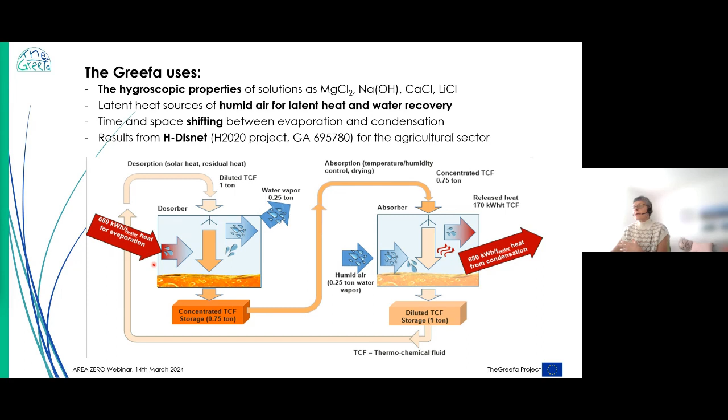They can also happen at the same time, but they need not be at the same time and at the same place. So we can recover heat in one place, store it for months, and then use it in another place after one year and so on. So this is the innovation.

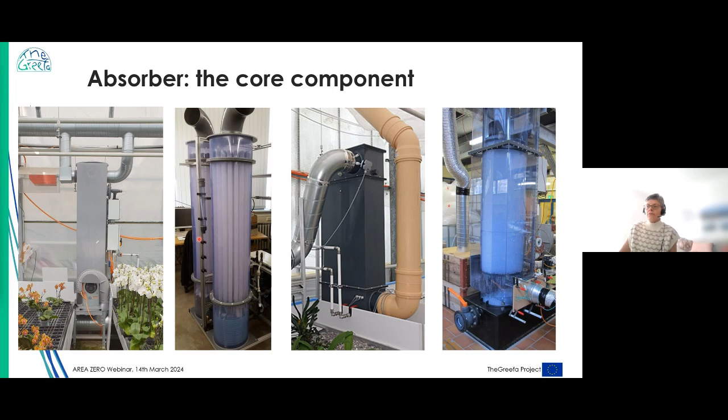The absorber where this process takes place is very simple. You can see here some constructions, actually plastic scrubbers. The rotating components are just a ventilator or fan for air and a normal pump for salt solution, so they are very easy. The construction and design can be different, but the concept of what happens inside is the same.

Why use this in a greenhouse? You can see a small schema. What happens, especially in a continental region, is that humidity is normally controlled by opening and closing the window, and of course, by opening the window, we lose a lot of heat. With this system, when we...

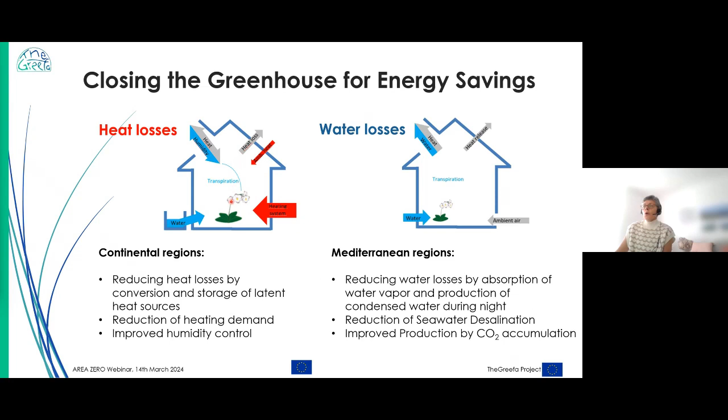So this is a standard greenhouse. We open and close the window, we have some heat loss, but we can control the humidity. In the greenhouse, it's very important to open the window because of the transpiration of the plants, otherwise the humidity becomes too high. With our system, we don't need to open the window anymore, which means we don't have these losses. The humidity is absorbed in our absorber, and this absorber at the same time can release heat.

Another advantage is that when we regenerate the salt solution, the water from the salt solution in the desorber goes into the air, and with some other component we can also recover water from the salt solution. So in the end we recover the humidity of the air, which can be used as water for irrigation and so on.

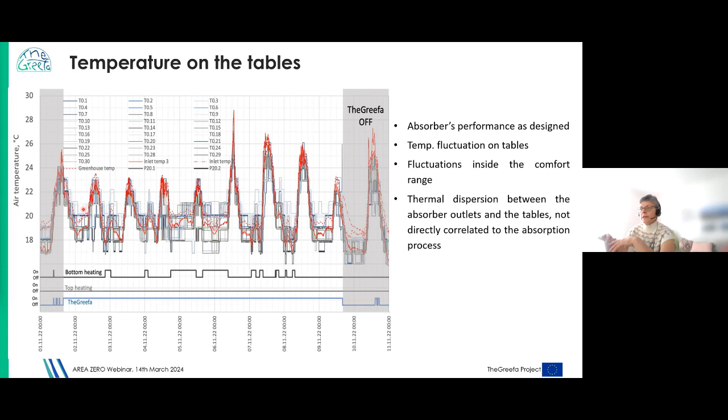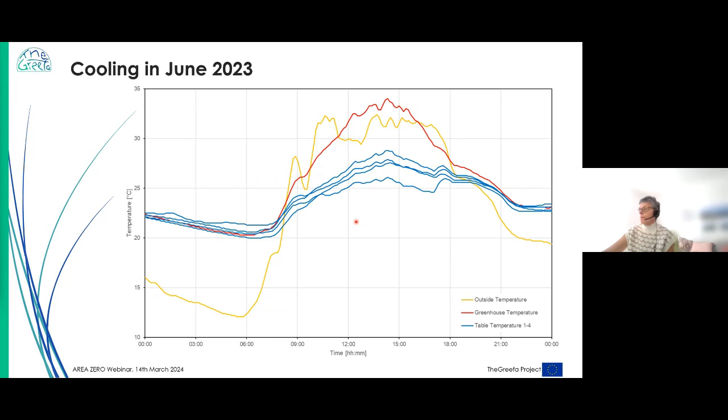If it was necessary to have a lower temperature, we were able to provide it by increasing the evaporative cooling. But for the operator of the greenhouse, this is an acceptable range. We tested this solution not just for greenhouses, but also for drying herbs and food.

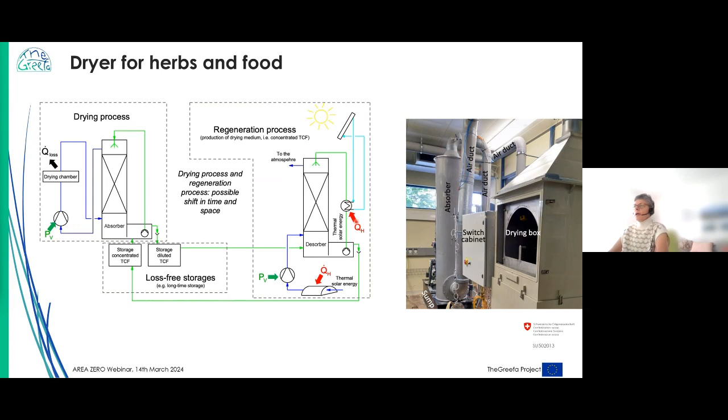In the absorber, you can dry the air, and this dry air can then be used in a dryer chamber to dry the herbs. Then it shall be regenerated with waste heat or solar heat.

We also adapted the construction of the dryer. It's very compact and easy to install in a real situation. If you want more results, here's the link—we have a report of this Swiss project. You can click there and get the report. I'm sorry, it's in German, but maybe you can translate it, or you know German, or you can translate it with some tools.

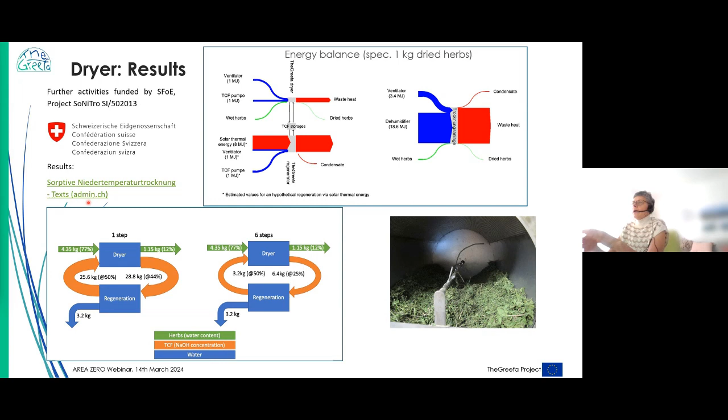But we found that what is important for the regeneration is not the absolute temperature we can reach, but the difference between the temperature of our salt solution and the air. So we need a temperature gap, not the absolute temperature. When the air temperature is 0 degrees, it's enough that our salt solution is maybe 10 degrees, not 40 degrees as in summer when we are at 30 degrees. So what matters is having this gap.

That means we can regenerate our salt solution very well also in winter when we have sunny days. The limitation in winter is, of course, that there are fewer sunny days, at least in our region, and fewer hours of sun than in summer. But when we have a sunny day, we can regenerate in the same way as in summer.

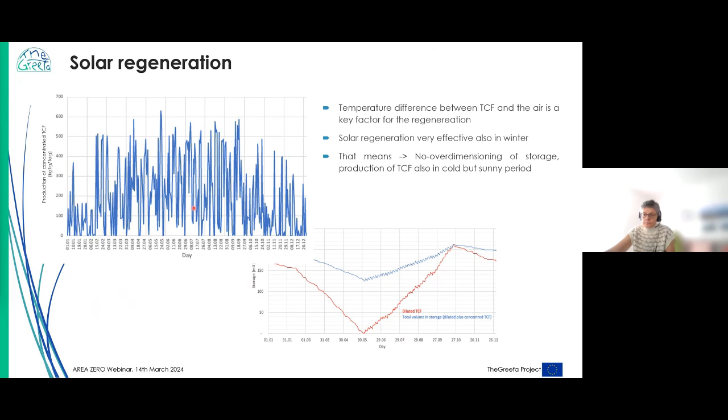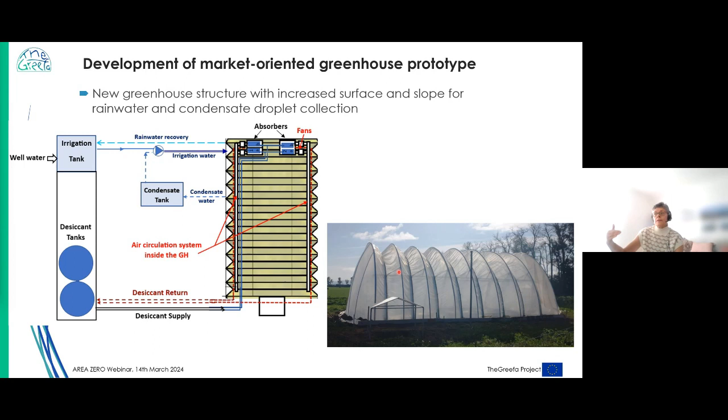I introduced before at the beginning and said that we have also another demonstrator, the greenhouse that we have in Tunis. The concept of a salt solution is more or less the same that we have in Switzerland. I repeat, we recover the water from the humidity of the air as water, and also with this construction it's also possible to recover the water, so the condensate droplets on the surface, and this is then used for irrigation. So this is some construction of our absorber, but if you have a question, I can explain better in answer.

So this is the presentation regarding TheGreefa, and I'm here for any question. Thank you. Great, thank you very much.

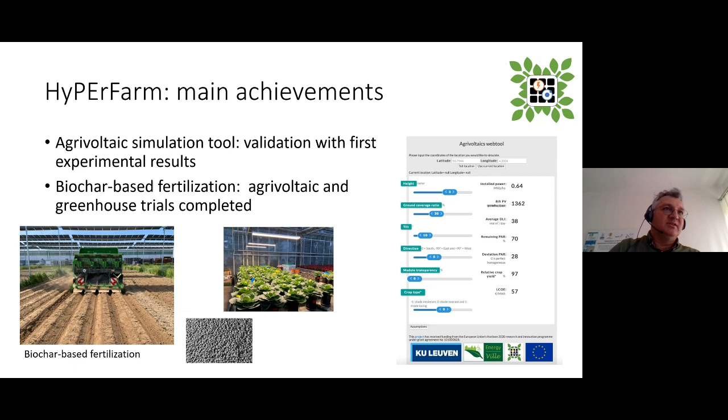Of course, biochar is not really linked with electrification when you look from a side, but here the aim is to produce biochar with solar energy, and then it can fit in the production plan. Here we do not have outside data yet. We see some crop data in greenhouse trials completed, but for the outside data we have to wait until the HyPErFarm project stops.

And by end of spring this year, we will have a compressor unit finalized that compresses the produced hydrogen, cleans it and makes it more dry, and we will use it as a part of a fuel for a hybrid tractor that drives on diesel and will use the hydrogen in its air inlet to reduce the diesel consumption and to retain its power. Again, the data will be there by the end of the project, but we foresee by the beginning of May that we can run our tractor.

We did a desktop study on batteries or storage systems on site, because we know that for a healthy business case on farm today here in Flanders and in most of the partnering countries, it is best to consume your own electricity and not to put it on the grid. That business case is not viable for the moment, but when you can be self-sufficient or partly self-sufficient, we tried to predict what type of farms benefit the best.

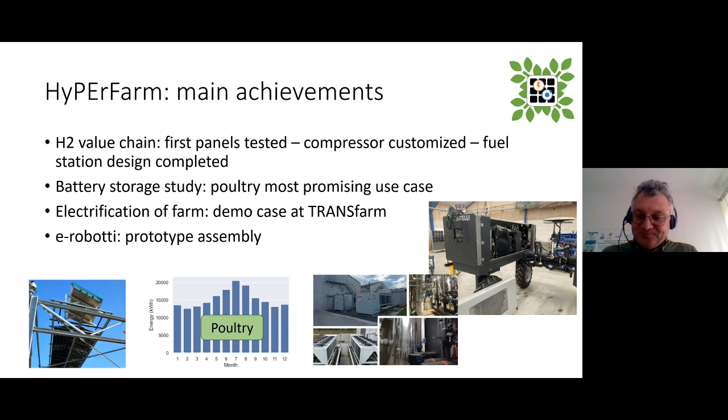No, I forgot to tell you that we climatize our animal units for poultry and pork with air heat pumps. And so we have a reduction of 100% of CO2 emissions today, and we climatize our animal units completely by electrification on site.

But what is important too is, of course, when it is interesting for farmers to start building, and what is the footprint of building systems. And when you go into the air with your solar panels and you don't use rooftops that are already available, you see on the right hand side that the cost of iron is really a heavy cost, not only in euros but also in footprint for your installation. So we are aware that not all arrows are green, there are still red arrows even for sustainability.

And there is, of course, a value proposition canvas that we made. Here we have more effect in production on our land because you have crops and you have electricity. There is also a new income from the energy because you don't have to buy it, or you can sell a little bit of it. We could not show yet that there are increasing crop yields, but there the crop research is ongoing. And of course, there are still high hurdles like permits, which are not easy, and the link with the grid, which in farm areas is quite far away, so a cost.

At the bottom right hand side, you see the network of possible stakeholders that can join us in electrifying and hydrogenizing farms, but I will go a little quicker. You see that we have looked not only at the economical side of the story, but also at what other people are thinking about what we are doing.

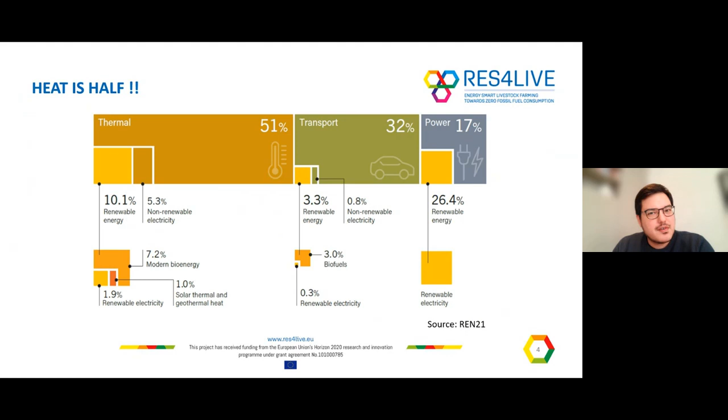We have 4 pilot farms, and in 3 of them we have installed a solar system, and this is what I will talk about today. So just a quick idea that I think is quite important. Thermal energy: half of the energy we consume on the planet is in the form of heat. And that being said, I'll explain a little bit about what a PVT panel is.

Or rather PVT collector. It's a combination of a solar thermal collector, which is characterized by the tube that you can see. It's a pipe basically where a water glycol mix goes inside, the sun heats it up, and then out comes hot water. And then you have a PV cell or a PV module that's laid on top. There are different ways of making a PVT collector.

The one you see here in the picture is a well-insulated one, which is good for high thermal efficiencies. But then you also get some which are not insulated to provide cooling for the PV modules, because PV cells do not like heat. As they get hotter, they become less efficient. So PVT collectors are very interesting when you have low space availability and you want to maximize your energy production per square meter, and also cost per energy.

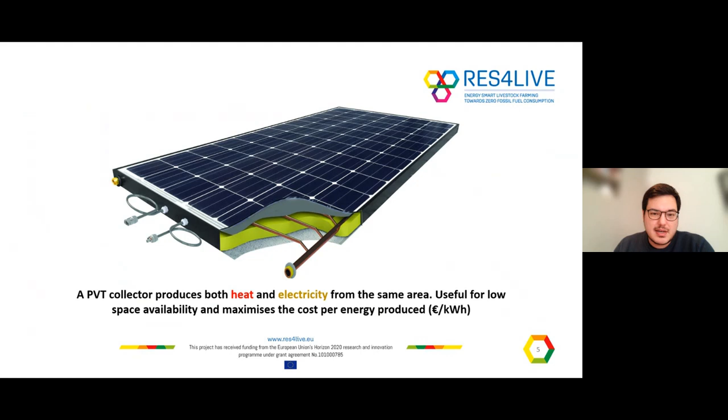So here you have a maximum efficiency collector. A PV cell can only be 20, 30 maximum percent efficient, whereas a thermal collector is 4 times more efficient at around 80%. So if you have a PVT collector, you'll have maybe 70% heat and 20% electricity coming out from one collector.

So in general, we have three pilot farms that we installed this technology on with 3 different PVT technologies, 3 different integrations with other renewable energy systems, and we have the same number of collectors per farm, just so we can compare between farms. So the first farm is in Ghent, in Belgium. It's the ILVO swine farm.

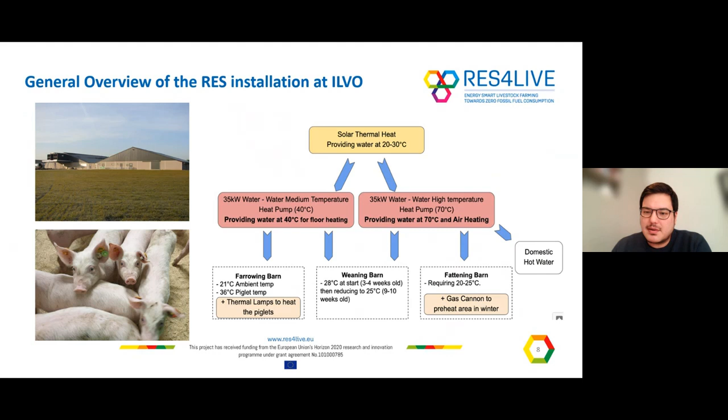The thermal collectors are connected to a short-term buffer tank, 800 liters of heat storage, and then the heat pumps draw the heat from the heat storage, and they create the heat for the actual farm. These have all been installed during the course of last year, so we don't have exact data yet, but we estimate 24 PVT collectors will amount to about 25% of the heat demand of the farm.

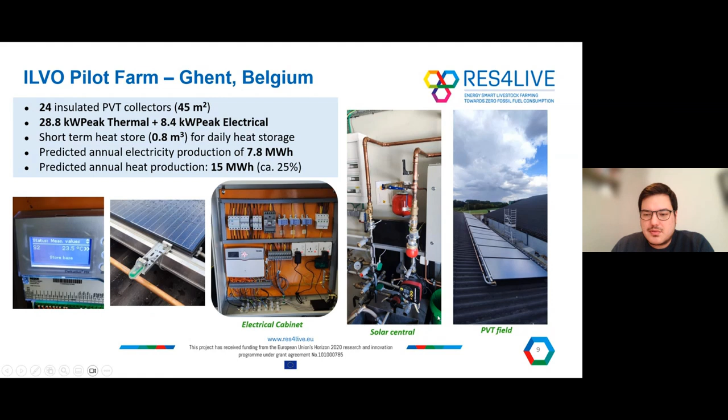Then we have LVAT Dairy Farm in Germany. Here we have a cattle farm, which has a milk chiller in the farm, and this milk chiller creates heat, which is being used by the farm. So we decided to take that heat and then further upgrade it. So the heat coming out will be around 40 degrees.

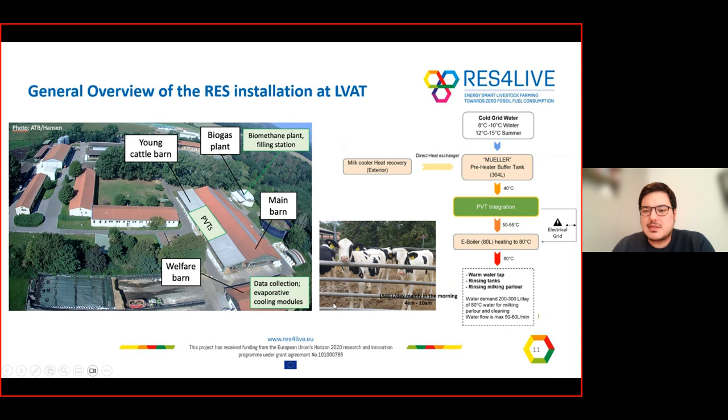It'll be upgraded to 50, 55 degrees by the PVT collectors. And then the remaining heat will come from an e-boiler that's on site. And that's being used for domestic hot water, cleaning of the barn, cleaning of the milk tanks, just general cleaning and usage of water.

So here we have a very interesting type of PVT collector, which is a concentrating PVT collector. You can see the solar field on the roof in the bottom left. It concentrates the sunlight to an absorber, which is under these PV cells that you see on the collector. The PV cells are bifacial, so they're on the top and on the bottom, as well as having the thermal absorber at the bottom.

This solar field is then connected to a larger buffer tank. There are 2 tanks of 750 liters each, making a total of 1,500 liters. This is then connected in between the milk chillers and the e-boiler. So it takes in the heat from the milk chillers and then upgrades it to provide higher heat for the farm. Again, we predict that it can contribute to around 30% of the heating needs of the farm.

Of course, just to mention, these are just pilot demonstrations. A farm can easily put many more thermal collectors to have maybe 90 or even 100% of their heating demand from solar thermal.

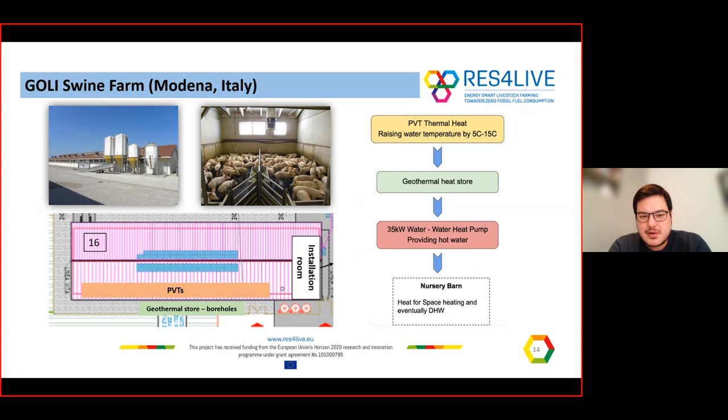Then we have our third pilot farm, that's the Goli swine farm in Italy. Here it's again a swine farm, and here we integrate in a different way. The PVTs are connected to a geothermal heat store this time. It's a borehole geothermal heat store, which is also connected to a heat pump. The boreholes will act as a seasonal storage. So the idea is to store heat for the winter, which the heat pump can then use, as they don't need space heating in the summer.

Here, a different kind of PVT technology was used. This time it was uninsulated. It's just a pipe with a PV module attached on top, much cheaper, more reliable, but also not as efficient. Since we don't need that much heat in this farm, we decided to go for this option, as it's also more efficient for the PV cells for electricity production. We predict about 90% of the space heating demand of the farm can be covered with this small solar field.

But again, this has just been installed, so we're now monitoring how it's working and all the data. We want to get results on how much they actually produce and how much it contributes to the farm.

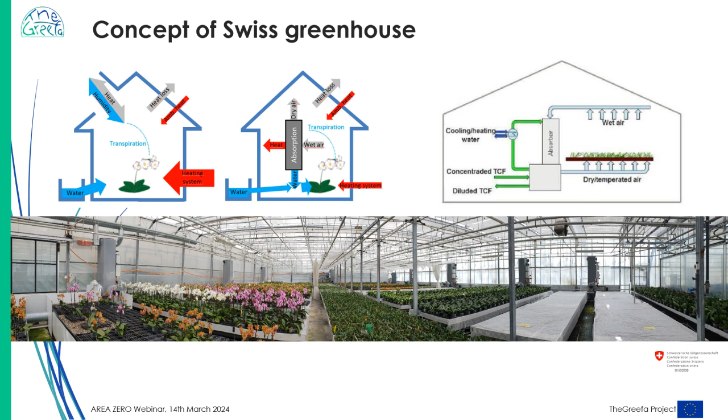So you see the greenhouse. What we add in the greenhouse are these components here. This is the absorber. And of course, you need some pipe for the salt solution, that in our case are around the wall. And the big desorber, for the regeneration of the salt solution, is outside of the greenhouse. It is a component like this, bigger, with a diameter of almost 2 meters, and is outside, unlike the absorber.

That means you don't have modification. The existing heating system is in any case installed and supports our absorber when we are not able to reach the required temperature. The increase of the temperature depends on the humidity of the air. If we are able to absorb a great amount of humidity, we can also produce more heat. If the humidity is not so high, the heat release also is less.

That means in any case, you need a support, especially for heating, the classical heating system, and you need some space to install this absorber, but you have additional components. You don't need modification. I hope that it's clear.

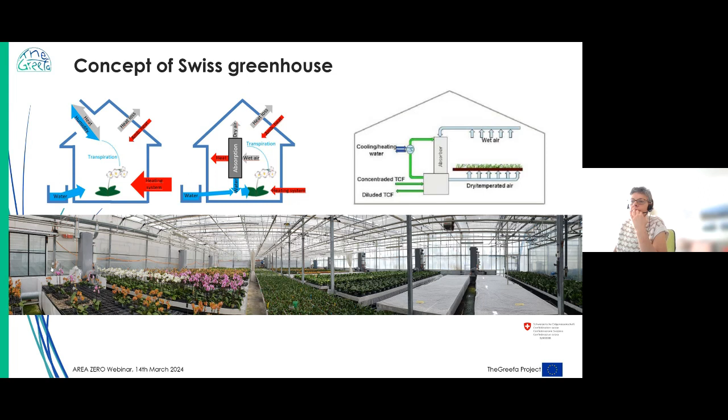The panel discussion will start with an introduction of the moderator and the panel members. Then we will have a discussion around 3 propositions. The audience will be allowed about 1 minute to vote. We ask you, the audience, to also raise questions and we can put them forward as we've done so far. We will start with the first proposition for the audience. As we await the results, we ask moderator Marleen Gijssen from the Boerenbond to take over and briefly introduce herself, and the other panel members as well. So get your phone ready for the voting, and I will hand over to Marleen.

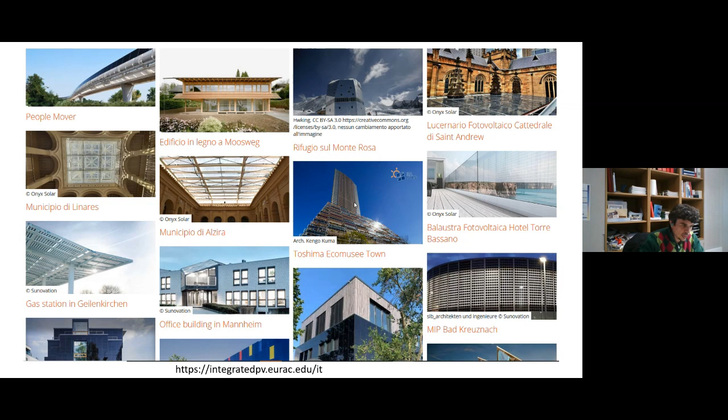When we wrote Symbiosyst, we thought about the key knowledge of the partners, and a lot of the R&D and industrial partners come from a lot of experience in integrated PV, mainly BIPV. We know that in BIPV we made a lot of advances, but also a lot of mistakes, because initially we really underestimated the complexity of having several stakeholders like designers, architects, planners, city planners, policymakers who have different opinions about aesthetics and so on. We thought maybe we could learn from all those mistakes and make sure we would not repeat them in agri-PV.

So here is just an example of how beautiful PV can be, integrated in various infrastructure. And those are the premises of the Symbiosyst project.

We believe the potential on rooftop systems is high, however the rate of installation is low. We know that large utility-scale PV is not a feasible option in many regions, especially in Europe. We have a lot of experience on the multiple levels of integration and involvement of various stakeholders coming from the integrated PV sectors, and what it means to have significant barriers for widespread adoption. So we believe agri-PV is in a unique position to learn from the past, to make sure we don't repeat the same mistakes.

We also want to avoid a concrete risk: having a broad definition of agri-PV used to justify large utility-scale PV systems just by cultivating some grass between the PV systems. This could represent a stop for the whole sector, because it could not be accepted by the population.

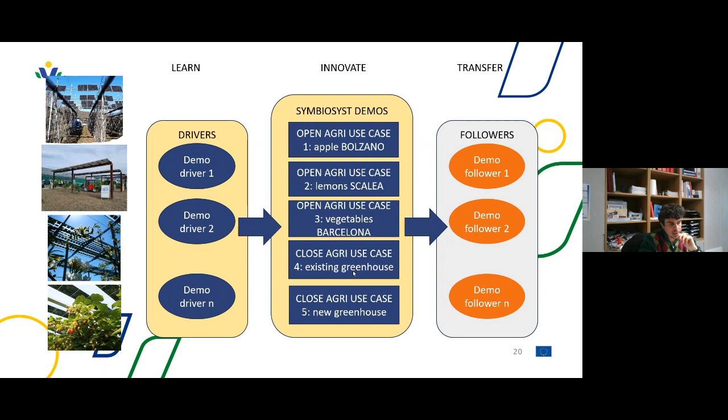So we will have different demos in Symbiosyst. The main demos will be one on apple orchards in Bolzano as an open agri site, vegetables in Barcelona, also open agri, and a greenhouse in the Netherlands.

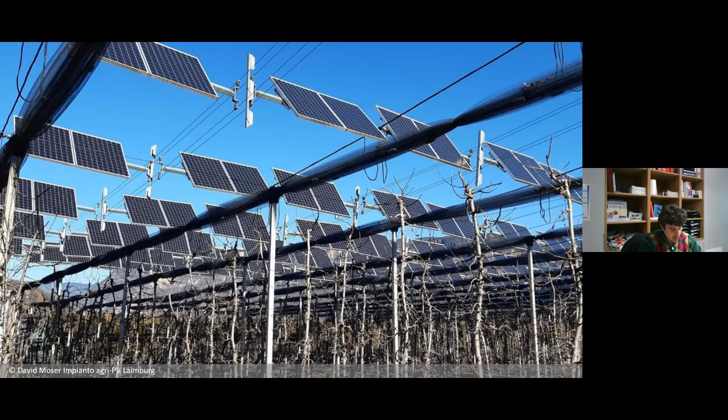An example of learning: this is an agri-PV system, old style, installed in 2008 — probably the first agri-PV system in Europe, installed not far from Bolzano. We are going to install the new system close to that, also to show, from an aesthetics point of view, how the sector has advanced.

The idea of the demo drivers is really to provide valuable information on structure, data, sensors, and monitoring systems. So if I'm also talking to the projects previously presented, if you have any experience to share, please join our demo drivers group. We will organize events and calls together with the Symbiosyst consortium, and see how we can mutually benefit from this exchange of information.

We want to innovate. We have a lot of partners involved in modeling, looking into light sharing in open agri-PV, both in open fields and in greenhouses, and looking into the effect of albedo and reflectance. I'll show you some results later on.

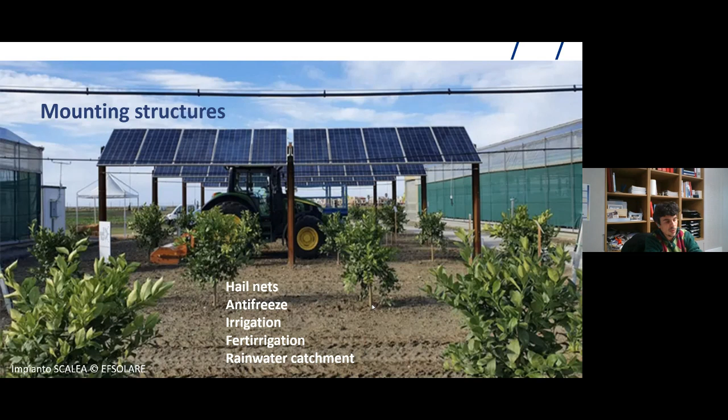In terms of mounting structure for the open agri system, we are looking into single axis tracking systems, exploring different levels of semi-transparency of the modules, and the integration of hail nets, anti-freeze systems, irrigation and fertirrigation, and rainwater catchment. We are also looking into robotic solutions with the partners from Barcelona, for example.

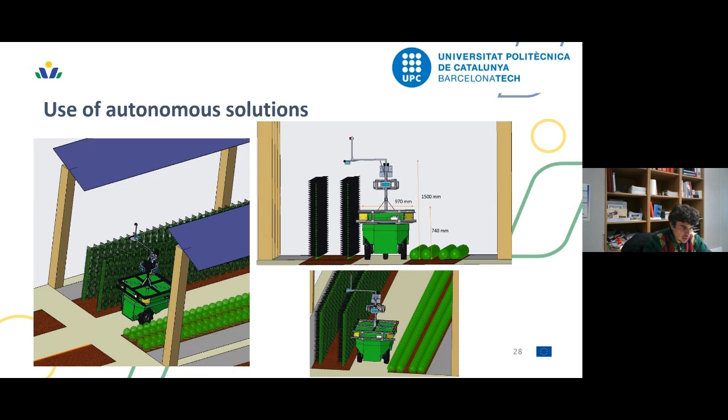Here are some preliminary designs, but in reality the robot is already operating — it was demonstrated to us during the last meeting in Barcelona in January. The robot can travel in the field, create a 3D mapping using LiDAR to build a digital twin of the crop and the agri-PV plant. It can do image recognition, and at this point in the project they are training on images to recognize different types of leaves and the status of the leaves.

Just a few details about the demonstrator in Bolzano: it will be a 90 kilowatt peak demonstrator with single axis trackers, at a height of 4.7 meters. We're going to explore different levels of semi-transparency, and look into installation on an existing plant with crops, but also install together with new crops, to really look into both challenges of introducing an agri-PV system with existing trees and with new trees.

Moving towards the conclusion, we are also looking into environmental and social justice through semi-structured interviews, which we're going to conduct for Italy, Spain, the Netherlands, and possibly Belgium.

It was interesting to see the paper published by the other projects. So far, from Südtirol, we have more than 500 responses from local farmers, and it's interesting to see that more than 40% would like to install an agri-PV system.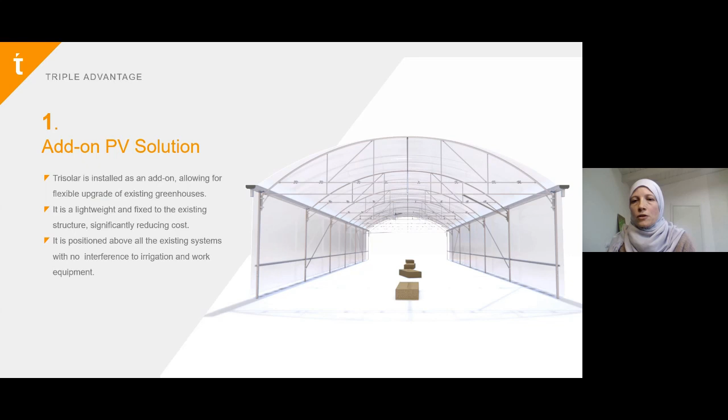But first I want to explain what the technology is about. It's a crop responsive agrivoltaic technology for inside greenhouses. You can see here it's mounted inside the greenhouse. It uses the existing greenhouse structure to mount, so there are no additional structural elements, and it's mounted above crop level, so it doesn't interfere with the agricultural work inside the greenhouse.

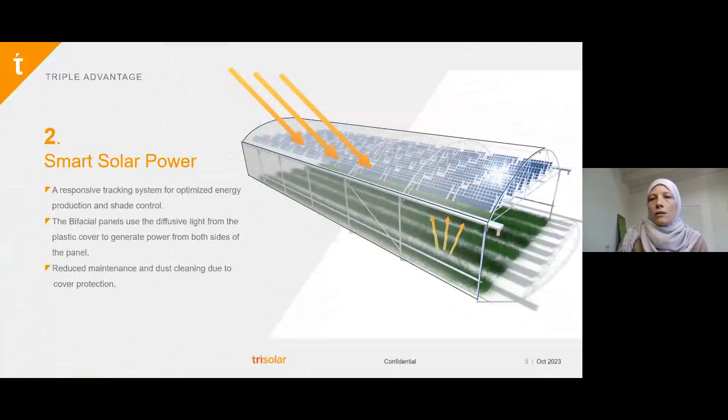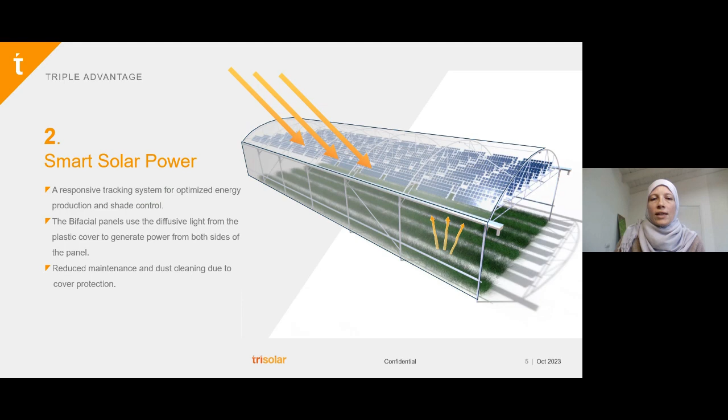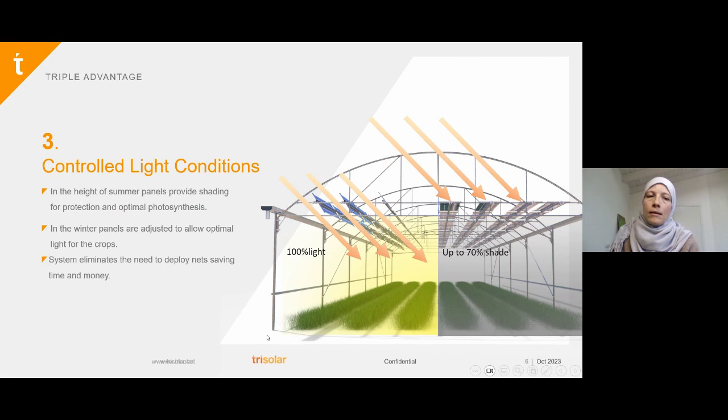The tracking technology, as I mentioned, is crop responsive, so it can either do some tracking if there's too much light, or be fully open when there isn't enough light, as you can see here. So it can provide full light by tracking the sun open, for example, or full shade by tracking it shut, providing maximum energy output.

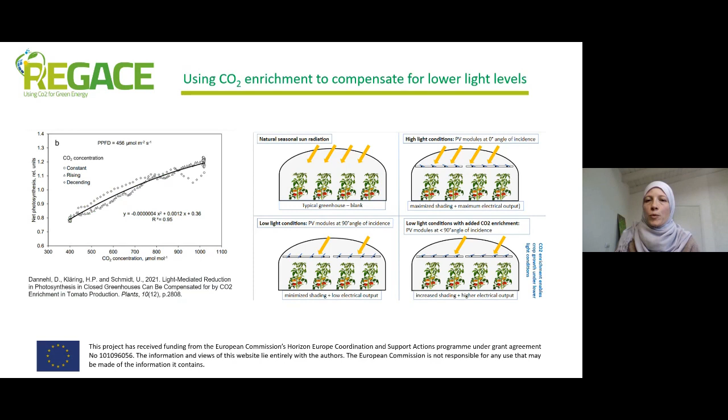So the idea here is to combine this technology with CO2 enrichment so that we can increase both electric and crop yields. When you use CO2 enrichment with certain crops, you can work with lower light levels, and by doing this our panels can face the sun more, producing more electricity. We're looking at this especially for more northern climates, so that this technology can also be appropriate for them. So there are different work packages.

I won't go through all of them, but we're looking at different aspects. So the implementation, so adaptation to different greenhouse types. Then there's the testing of it. So looking at the effect from various aspects, from the electricity production to the crop yields, the crop behavior, and the greenhouse microclimate, and the effect of the CO2 enrichment with this as well.

Then there's of course also looking at validation, also looking at the social aspects in this project, where our partners in University of Tor Vergata are looking at how this technology is getting feedback from farmers, and they've done a bit of work which I will present as well on that side. There's of course also the economic and environmental aspect in the project.

So the technology that I just showed will be installed in these different locations, the most northern one in North Germany, and the most southern one in Kfar Qari in Israel here. We have two farms that are shown in red, and the other installations are in research centers and universities. And we're looking at different methods of CO2 enrichment. So we have the standard CO2 cylinders or tanks, which will be tested in Berlin and in Volos.

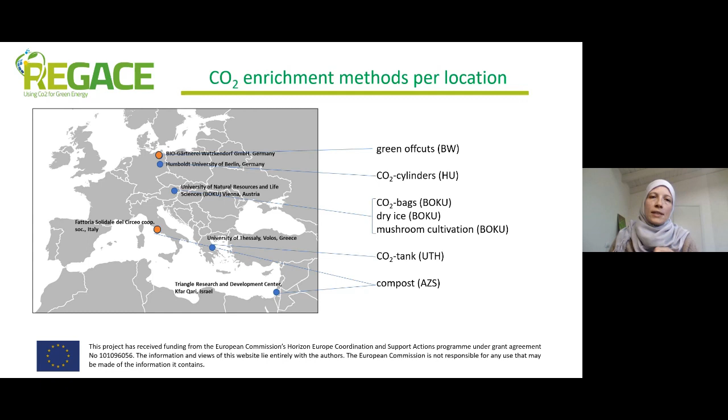But in addition, we're also looking at more sustainable ways of CO2 enrichment, using green offcuts or compost, or also mushroom cultivation, as shown in Vienna. Our partners on the farm in northern Germany already have experience with this, where they spread green offcuts in the greenhouse, and this naturally increases CO2 levels by about 200 ppm. So this is something we would like to test in combination with the tracking technology.

So the idea is we're looking at it on two levels: the way the technology works in these different climatic conditions, but also how we bring in the CO2 enrichment part. On the top picture, you can see our first installation, which has already been installed on the farm in Italy. The testing and measurements are just starting now, but at the same time our partners in Berlin have been testing different light levels, different CO2 concentrations, etc., within these phyto boxes that you can see in the picture below.

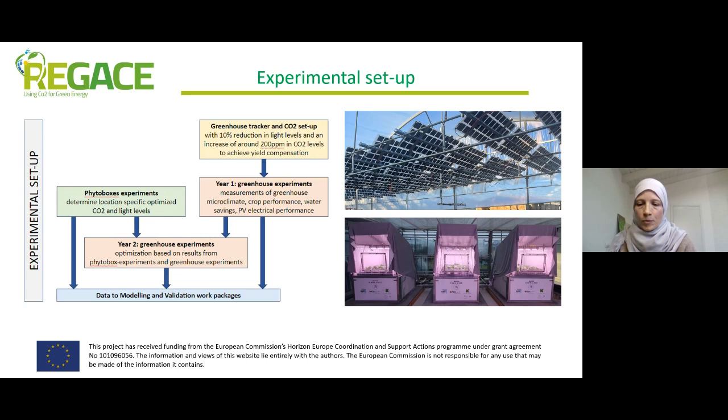The idea is to combine these two aspects together to optimize CO2 concentrations where this is possible with, for example, CO2 cylinders and tanks, and also to predict what effect this might have, so we can optimize or adapt our tracking technology with the CO2 enrichment, which means we can change our values in the tracking software so that our light thresholds are altered in respect to the CO2 enrichment. In other words, we can play with lower light on crop level with the CO2 in the greenhouse in order to increase electricity production. So these are experiments that have started.

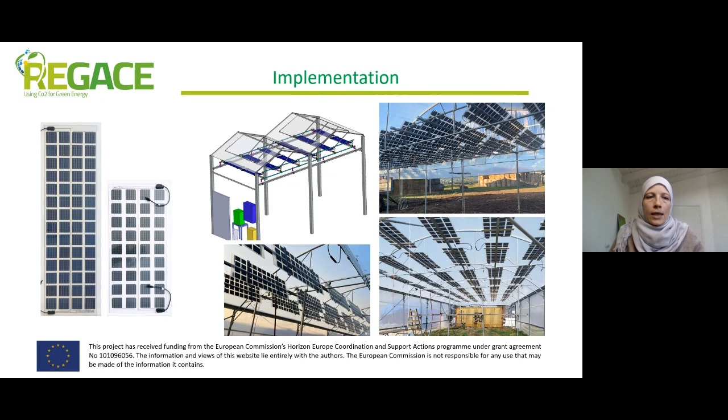You can see on the left the type of panels that we're using. These are custom-made bifacial panels, and they are semi-transparent because the spaces in between the cells are transparent. So we have different configurations for the different sites depending on the climatic conditions, and also depending on the typical crops grown there. So these are adapted according to location.

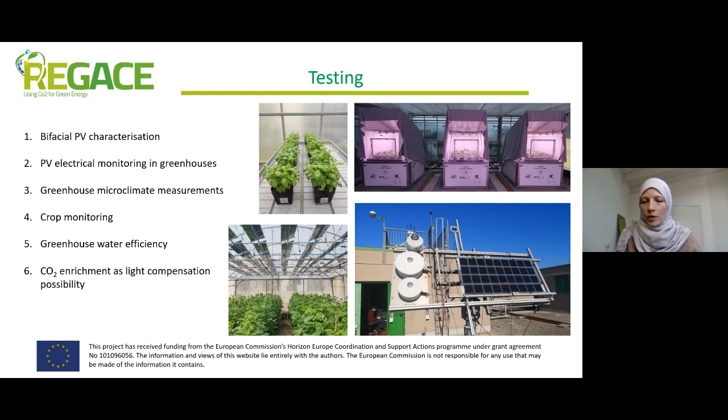So for the testing, these are the aspects looked at in the project. We're looking at the characterization of these different panels; that's the University of Rome. There's the electrical monitoring in the greenhouses, which is Al-Zahrawi Society. The greenhouse microclimate measurements task leaders are University of Thessaly in Greece, crop monitoring is Boku University in Vienna, and water efficiency is Humboldt University in Berlin, and CO2 enrichment is also being investigated by them. These expertises are shared between the partners, so we're carrying out the same or similar experiments in the different locations with advice and input from the different partners.

At the same time, there's a modeling aspect to the project as well. Digital twins are being created of these greenhouses, and different aspects are being modeled: the greenhouse microclimate and energy, the CFD modeling, the PV module performance, water efficiency, and the digital twins, as I mentioned.

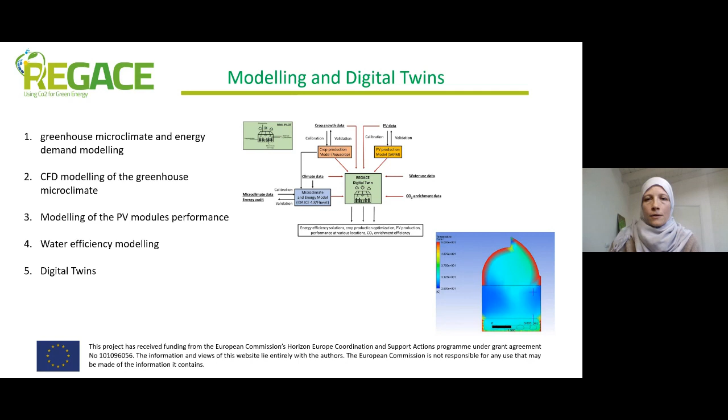So other areas that are looked at in the project is the economic sustainability, so looking at land impact from the PV systems, the resource efficiency, and also the circularity potential, especially when it comes to the CO2 enrichment methods inside the greenhouses. There's, of course, the regulation aspect to it, looking at greenhouse agrivoltaic regulations and coming up with some advice at the end and feedback that is relevant to the technology in this project. And then there's the innovation management and business planning aspect, and of course dissemination and visibility as well that are carried out in the project.

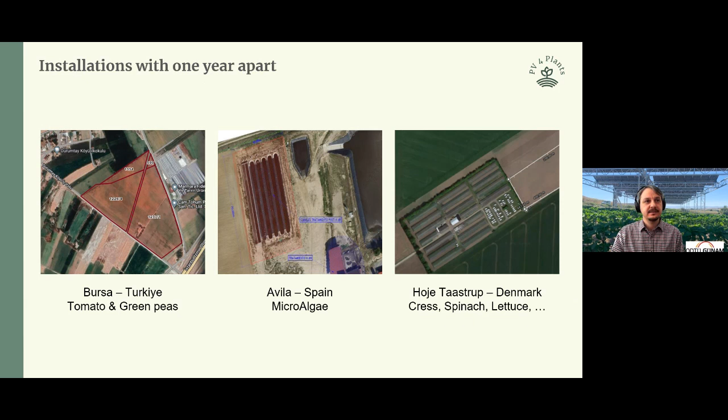So in our consortium, we have a spread of the partners and also spread of the knowledge that they are bringing into the project. So we'll start with work package number 1, which is user acceptability. DTU is mainly taking the role with Glue, and we have already started doing surveys and got the first results, which I will show in the next slide. Now we have lab testing methods at Sheffield University, where there are conditioned rooms.

And in those conditioned rooms, we already started growing some tomatoes to understand the effect of the spectrum on those tomatoes. Then we have the spectrum engineering part by Yıldız Technical University and us. And we fabricate the modules in Kalyon PV, who is the coordinator of the project and also a big PV manufacturer in Ankara. And we have smart farm sensing and R2M solutions for the irrigation and all the controls: irrigation, the position of the panels, and so on.

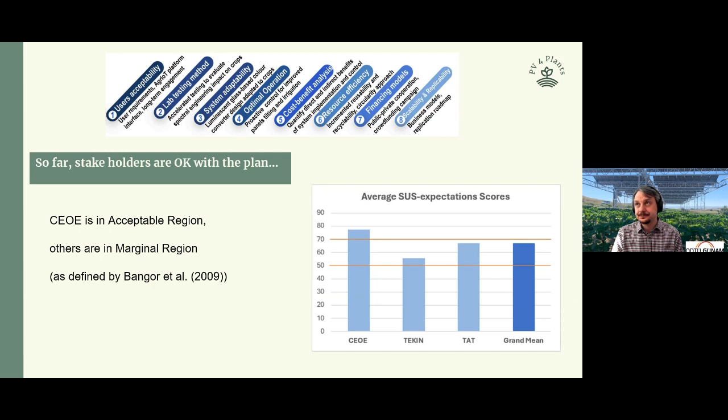And the second one is the main innovation, and the one on the left actually shows it. What we have is an idea to control the red light emission by reducing the light from blue and green. And this red light control we can do both position-wise and intensity-wise. So now we're trying to understand the effect of this additional red light on crops that we are going to use.

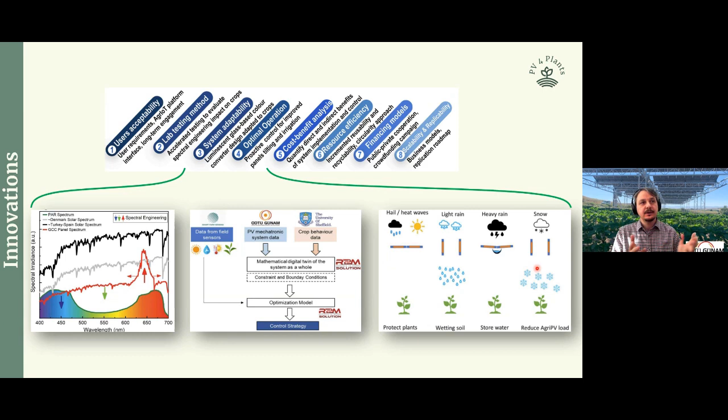In Sheffield University, inside the closed rooms, in a very controlled environment, these are exactly the same crops, and the soil is mimicking the soil of the region where we are going to make the real implementation. And then we have the control strategy that will prioritize the plant or the electricity production. And we also have almost full coverage of the farmland when needed, so that for different climatic conditions and global warming, we can adapt our system to collect the water, reduce the snow load, or protect from heat waves.

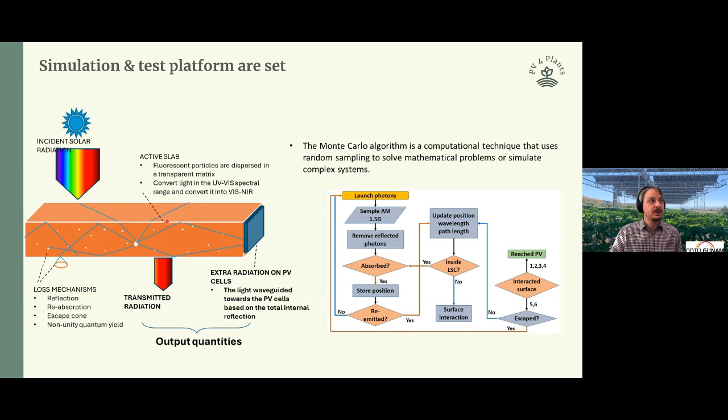So to achieve those goals, we developed a simulation and test platform. Basically the light is coming, and we trace every photon and see if it is going to land on the photovoltaic or on the plant, and if it is on the plant, what color it will be. Then we compare this with our indoor experiments, and we circulate this idea to finalize what design it should end up with.

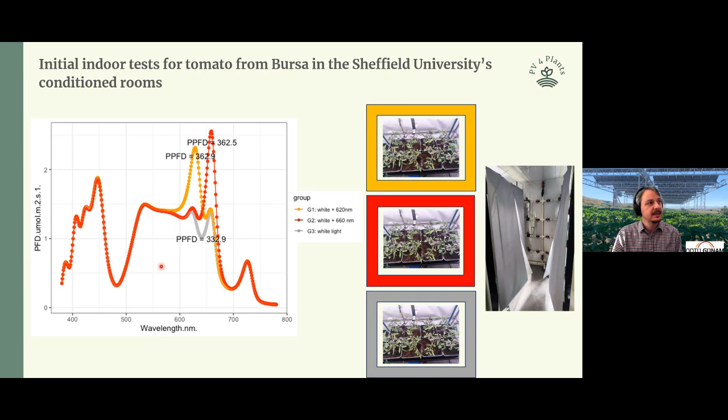And then, as I said, we are already using the indoor facility to understand the effect of this red light: how much we should increase it or how much we should shift it, because we have control over this position. We already received the first results, and I'll show only one, not very interesting one: the flower number among the three groups. The number of flowers is pretty much the same, but we do see differences in some other parameters.

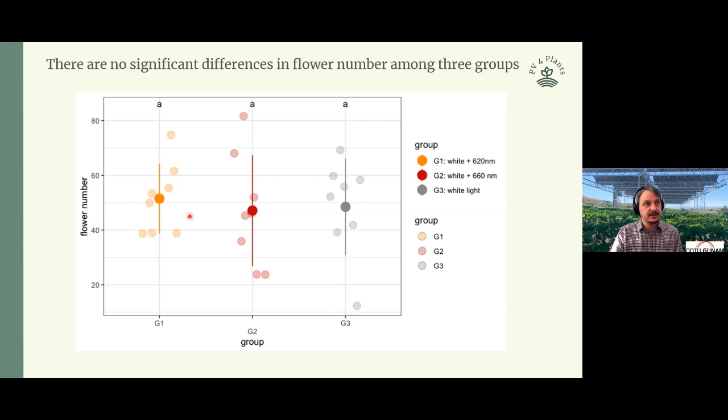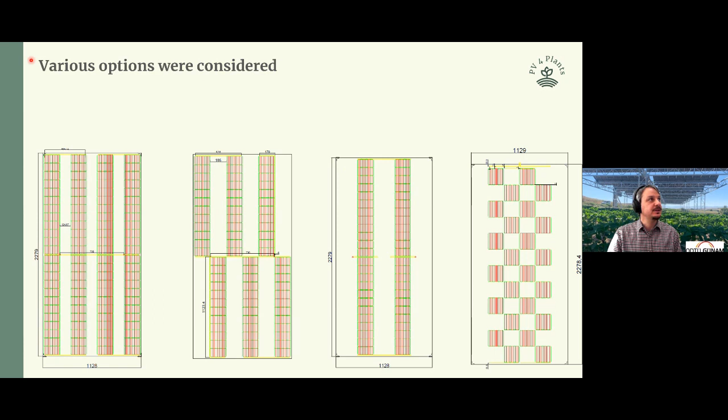After circulating between the indoor experiments, simulations, and the fabrication of the control systems, we ended up with different designs, and we had to choose one. Some of them are better for photovoltaics, some are better for the plants. Better means more light reaching the plants, or more electricity we can produce. We picked the third one because it is relatively easier to fabricate for the first year, due to the time stress on us, because we need to finish this in a few months from now. And this is the data that shows the spectral shift.

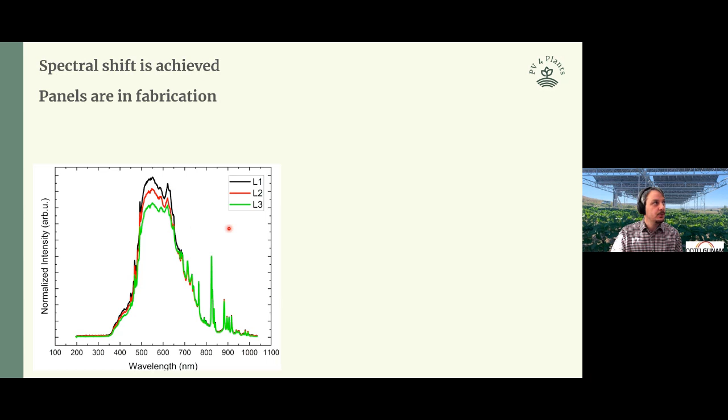You see, we can reduce the peak intensity. This is the real sun, you can think of. And we can reduce to 500 nanometer, which is the green light, and we can shift this spectrum to the red light right here. So it's kind of working fine, and we fabricated the 50 panels already.

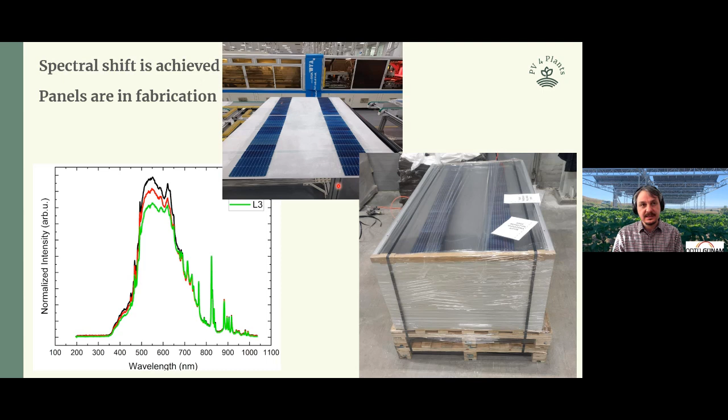So luckily, we also have a national project where we can change the spacing between the solar cells and make it denser compared to this one. So we just try to combine other projects onto the same field so that we can make more experiments, more controlled experiments in the field. This is hopefully how it is going to look in about 2 months from now. That's the goal, because we would like to catch this tomato season. And this is how it's supposed to look very soon.

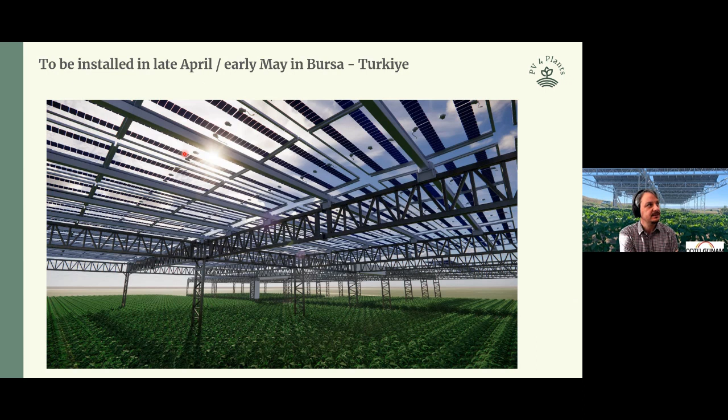So the other one is a little bit of an announcement. From the 3rd to 5th of July in Ankara, we have the PVCon conference. It's a conference that we have been organizing for quite a long time. I think this is the 6th in the series. We will have an agro-PV panel. As I have shown you, the Turkish industry is pretty much interested in agro-PV, and they're pressuring the agricultural ministry a lot, and we would like to increase agro-PV systems in Turkey so that we can make more analysis before any law starts acting on it.